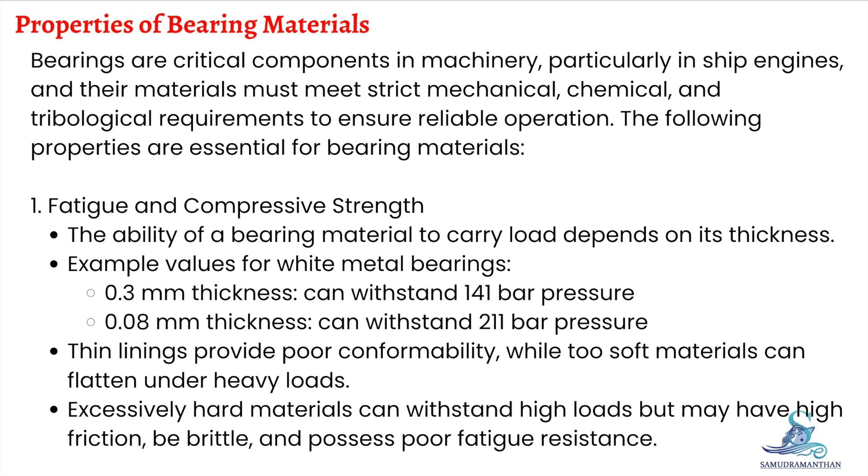But here's the catch: thin linings have poor conformability, and too soft a material can flatten under heavy loads. On the other hand, overly hard material can take high loads, but tends to have high friction, brittleness, and poor fatigue resistance. Next is softness and modulus of elasticity.

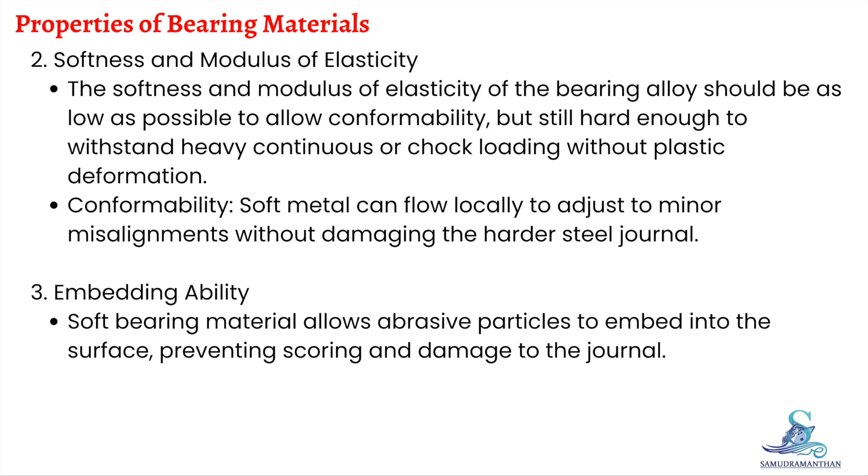Ideally, a bearing alloy should be soft enough to allow conformability, meaning the material can flow locally to adjust for minor misalignments, but hard enough to resist plastic deformation under heavy continuous or shock loading. Then we have embedding ability. This is important because soft bearing material allows abrasive particles to embed into the surface, preventing scoring and damage to the journal. Corrosion resistance is also essential.

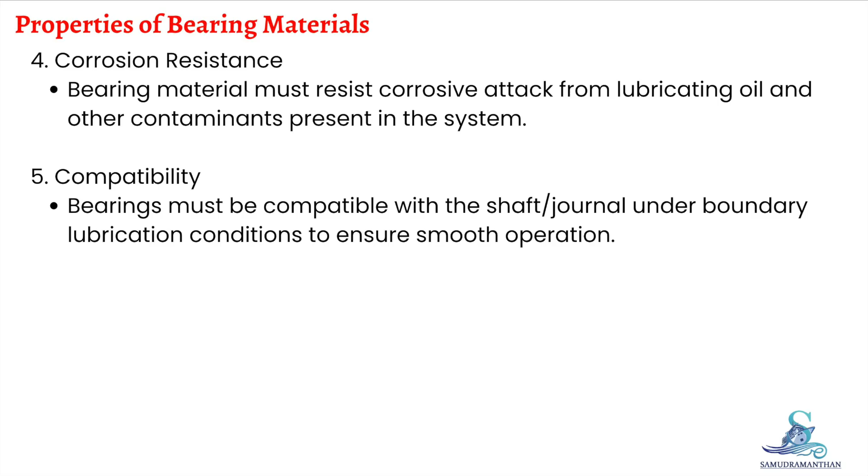Bearings must withstand attacks from lubricating oil and other contaminants. Along with this, bearings must be compatible with the shaft or journal under boundary lubrication conditions, ensuring smooth operation. Two more crucial properties are anti-weld and anti-score properties. These prevent localized damage between the shaft and journal during startup, shutdown, or turning gear operation.

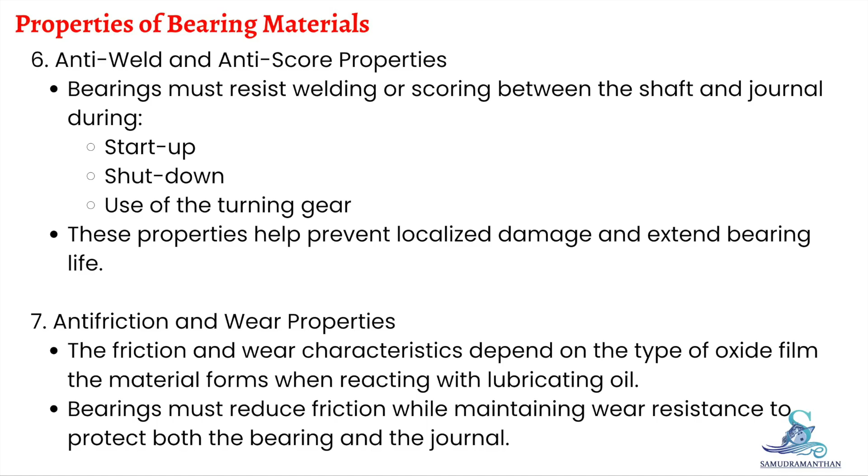Finally, the anti-friction and wear properties of the bearing depend on the type of oxide film formed when reacting with lubricating oil, reducing friction while maintaining wear resistance to protect both the bearing and the journal. Now, let's move on to thin shell bearing characteristics. Thin shell bearings are widely used in modern engines because of their design efficiency and ease of replacement.

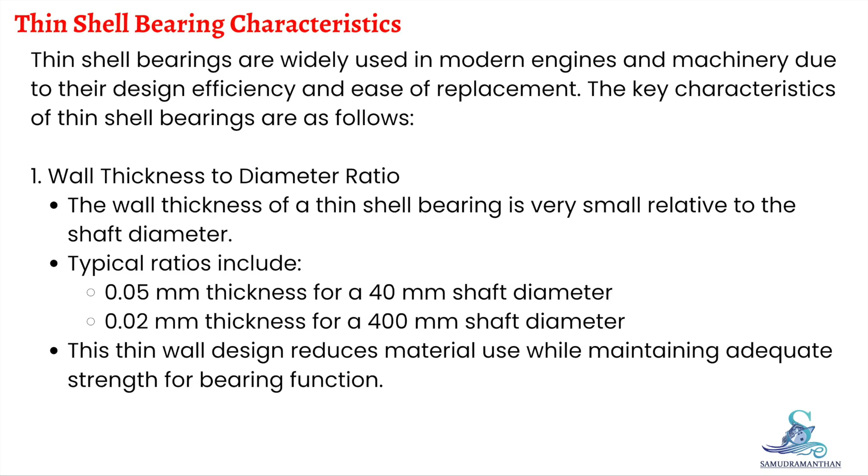The wall thickness to diameter ratio is very small, for example, 0.05 millimeters thickness for a 40 millimeter shaft, and only 0.02 millimeters for a 400 millimeter shaft. Despite this thin design, they maintain adequate strength for bearing function. They are fitted with a slight interference fit, which prevents relative movement and reduces the risk of fretting, while also keeping the bearing in the correct axial location.

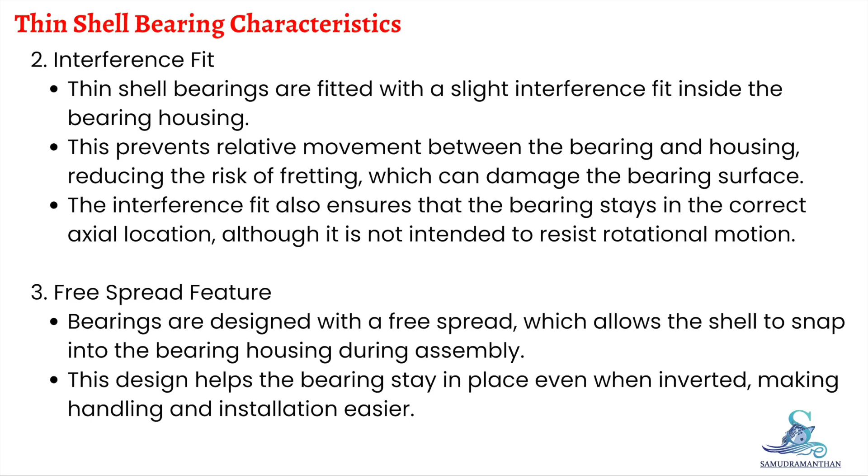A great feature is free spread. The bearing shell is designed to snap into the housing during assembly, and it stays in place even when inverted, making handling and installation easier. Now, let's compare conventional and thin shell bearings. Conventional bearings are made of forged steel lined with white metal, and vertical clearance is adjusted using shims.

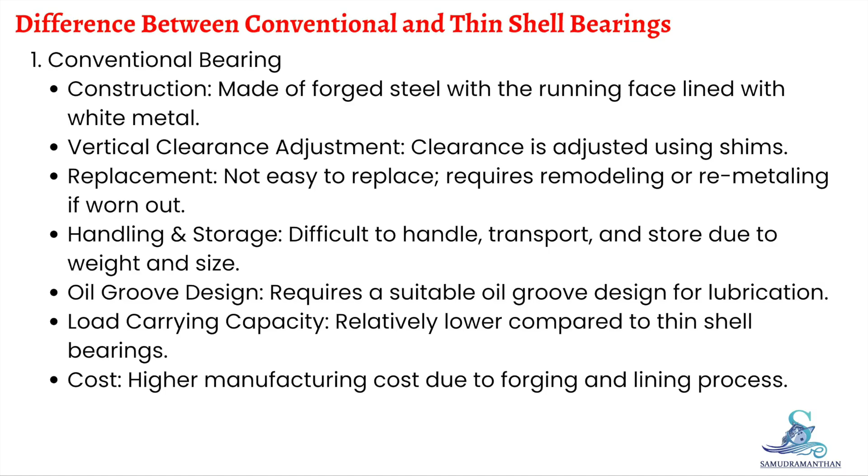Replacing them is difficult, often requiring remodeling or remetalling, and they are heavy, making handling, transport, and storage challenging. They also require careful oil groove design for proper lubrication, have lower load carrying capacity, and are more expensive to manufacture. Thin shell bearings, on the other hand, are made of tri-metal layers: a steel shell, copper or lead alloy, and a thin layer of soft metal on the running face.

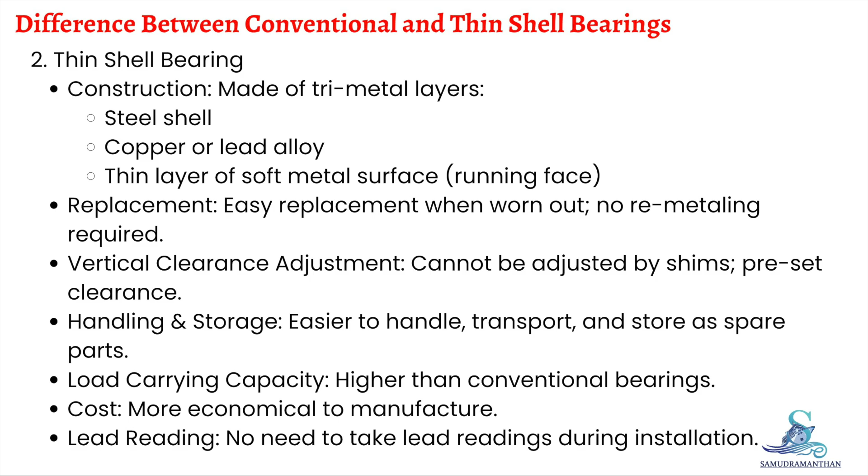They are easy to replace, don't require shims for clearance, are lightweight and easy to handle, have higher load carrying capacity, and are more economical to manufacture. And an added bonus, no lead readings are required during installation. What about the advantages of thin shell bearings? Well, they can carry about 5 times the load of conventional bearings.

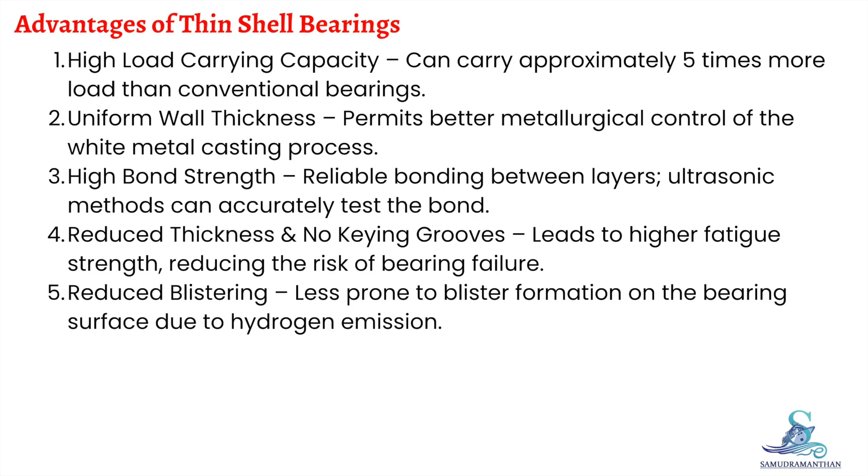The uniform wall thickness allows for better metallurgical control, and they have high bond strength, which can even be tested accurately with ultrasonic methods. Reduced thickness and the absence of keying grooves lead to higher fatigue strength, and these bearings are less prone to blistering caused by hydrogen emission. However, thin shell bearings also have some challenges. Insufficient nip clearance can affect lubrication.

Sudden extreme loads or pounding can cause damage. Improper fitting or using incorrect sizes reduces efficiency. Over-tightening of bolts can distort the shell. And fretting from the backing surface can interfere with operation.

In summary, understanding the properties, advantages, and limitations of bearing materials and thin shell bearings is essential for maintaining engine reliability, preventing failures, and optimizing performance.